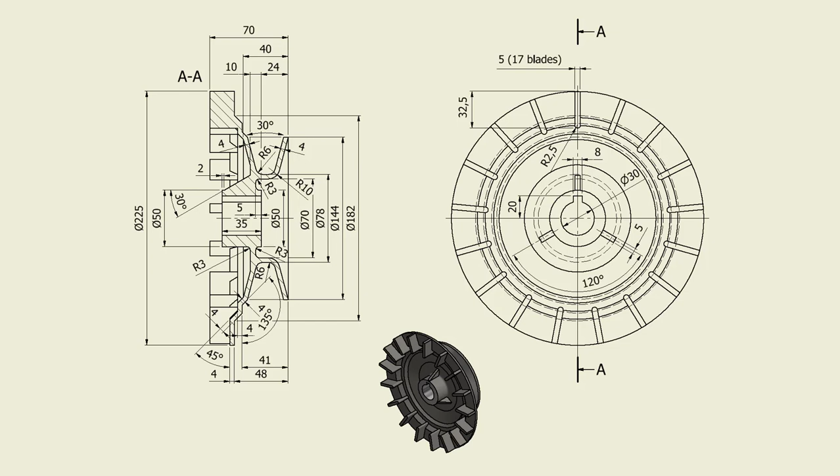Hi my friends, let's model the part number 27 cooling fan from my collection of 100 parts.

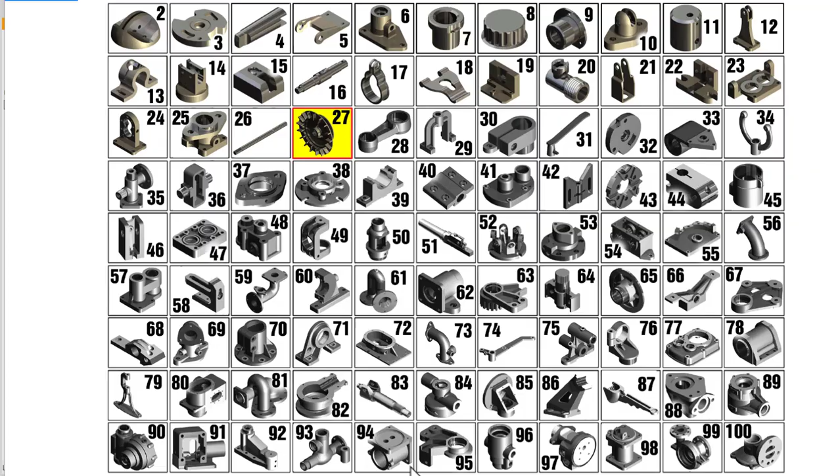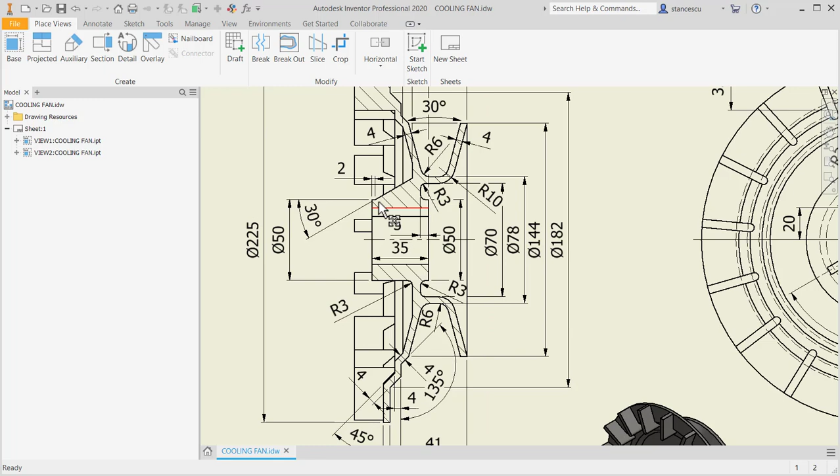Let's study the drawing. As you can see, this is a cooling fan. Look at the orientation, and it is mostly a revolution part. There is a contour here, all with the thickness 4, and a hub in the middle. This is the hub with a keyway.

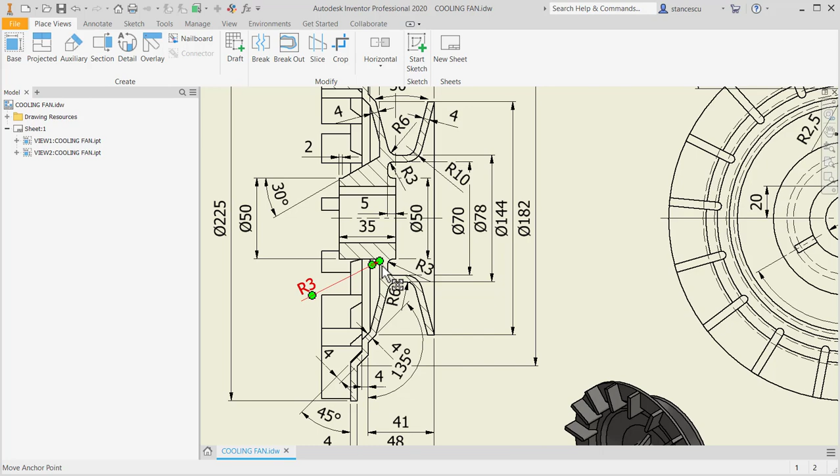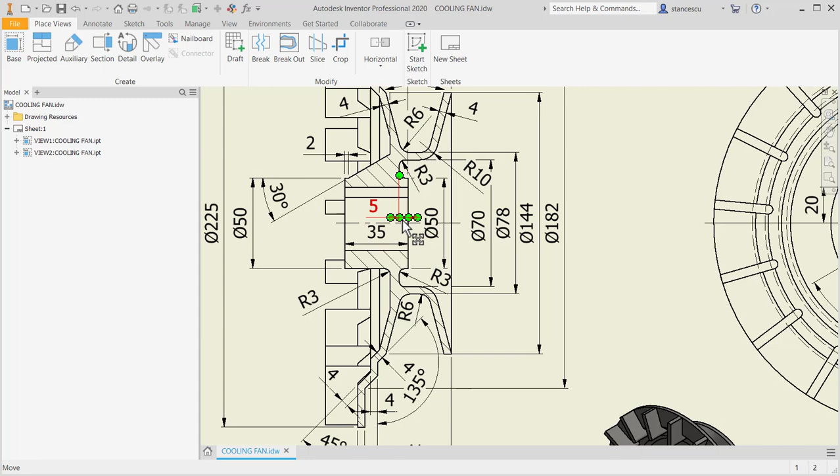And there is a connection between the hub and this contour of revolution based on this small connection. Okay, this is 4 millimeters all. You look also here, and here is 5, and here 10. This means that this is 5 millimeters instead of 4. This is another thing.

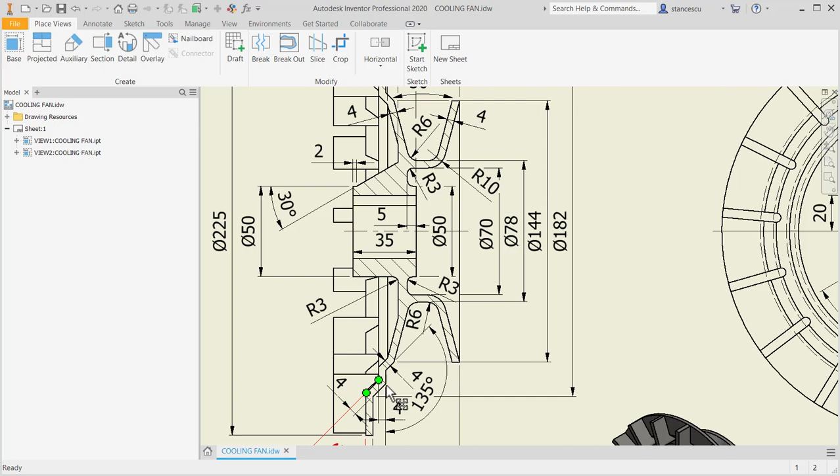We'll start by creating this contour with offset. Let's start. We use this plane, even if this is the vertical and this is horizontal, and I don't rotate the system anyhow. I keep in my mind that this is vertical, this is vertical, and this is horizontal. Okay.

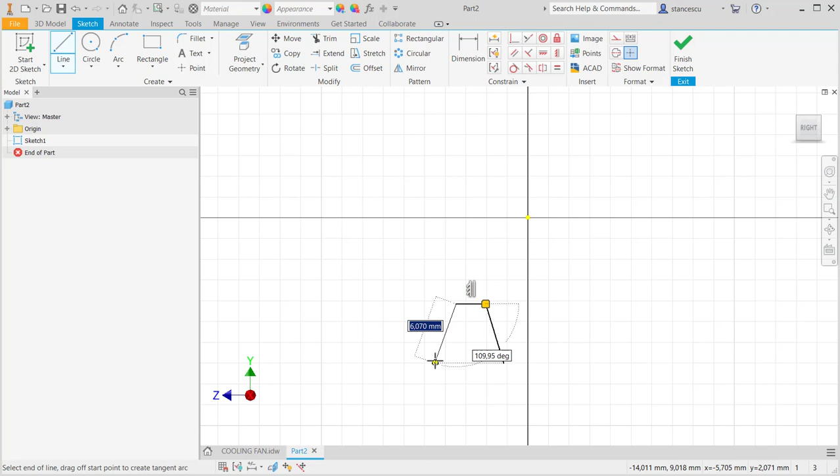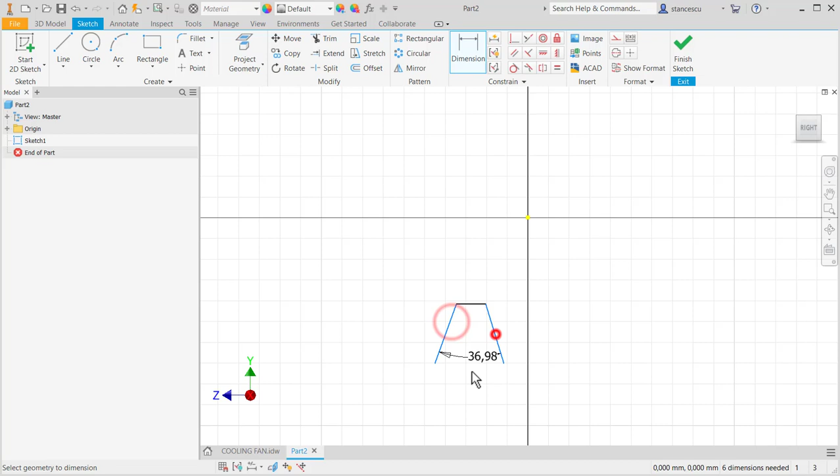Let's create the contour. I start with these 3 lines, which are these ones. Their ends are on the same line, horizontal, which means vertical, and the angle is 30 degrees. So the same vertical, these 2 points. The angle of 30 degrees, and equal this line with this line to be symmetrical.

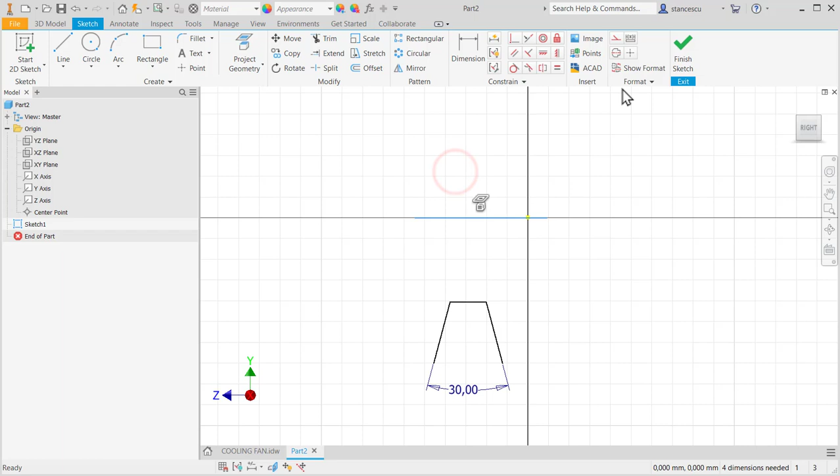Now I project the Z-axis as a center line, and I go to the drawing to see 78 is this diameter. Let's apply 78.

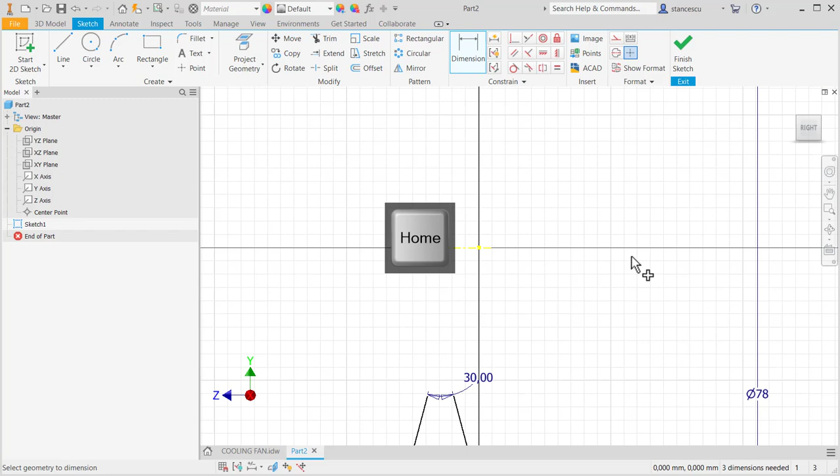Yes, they are in the other direction, but everything is fluid now. You have no idea about the dimension at the first moment, and this is why I try to create something little, not important, to place the dimension. The first dimension is 41 in this direction. I'll draw these 2 slope straight lines and 2 vertical.

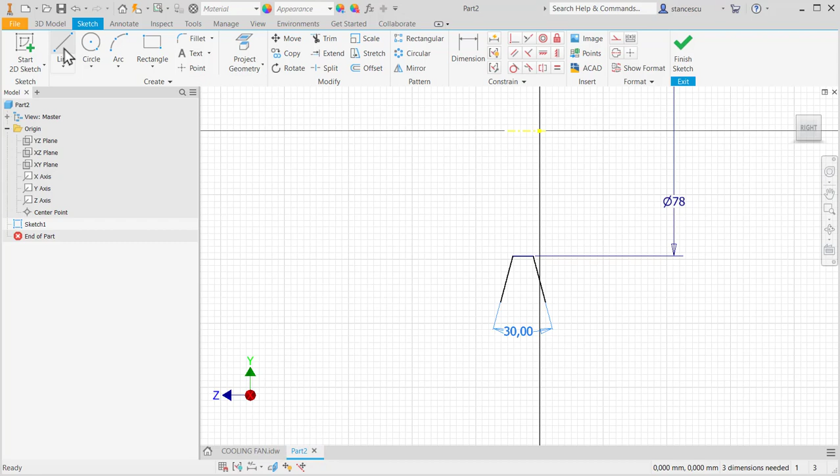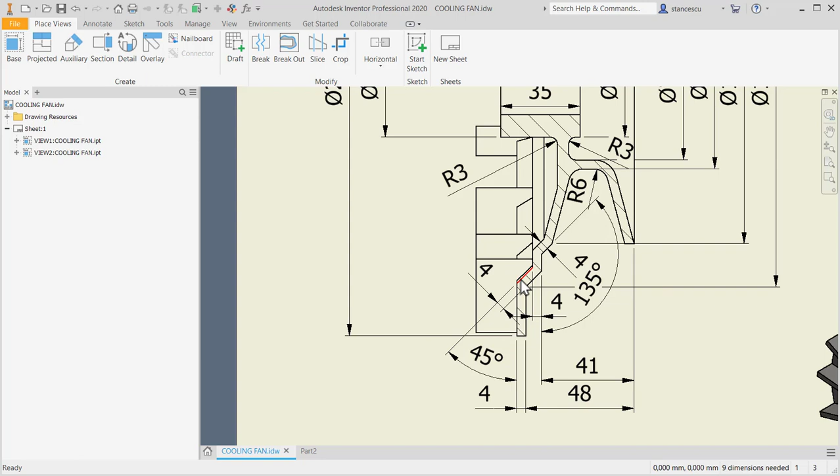One and the other. 2 angles: 135 degrees between these two and 45 degrees the other. This means they are parallel. Of course, 135 and 45.

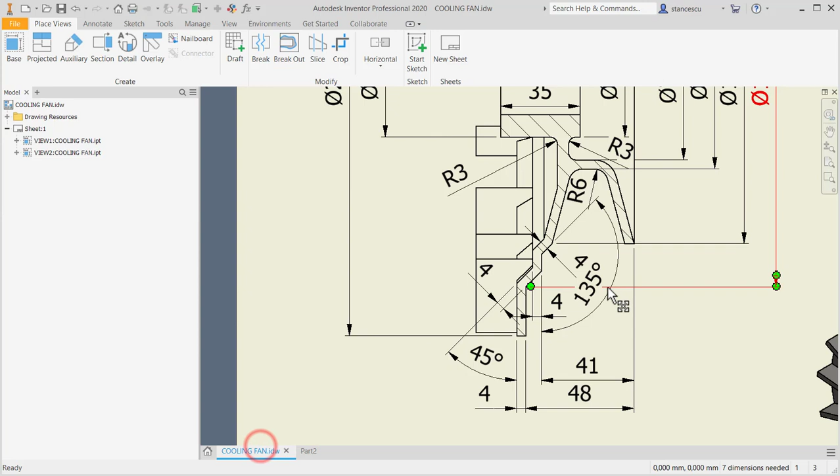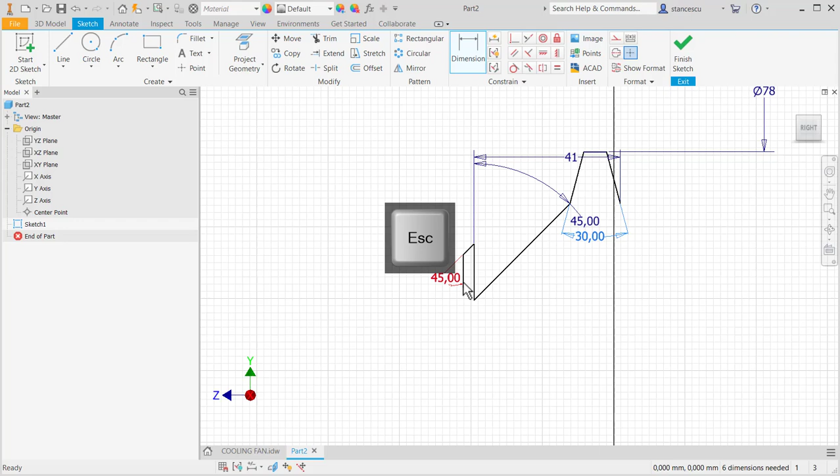Good. Now I can place the dimensions 41 and 48 to the first and second vertical small lines. 41, wow, and moving this here and this, and 48.

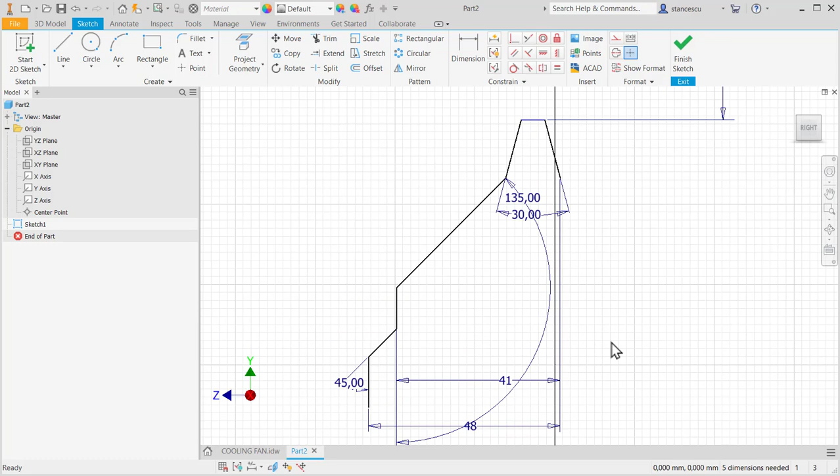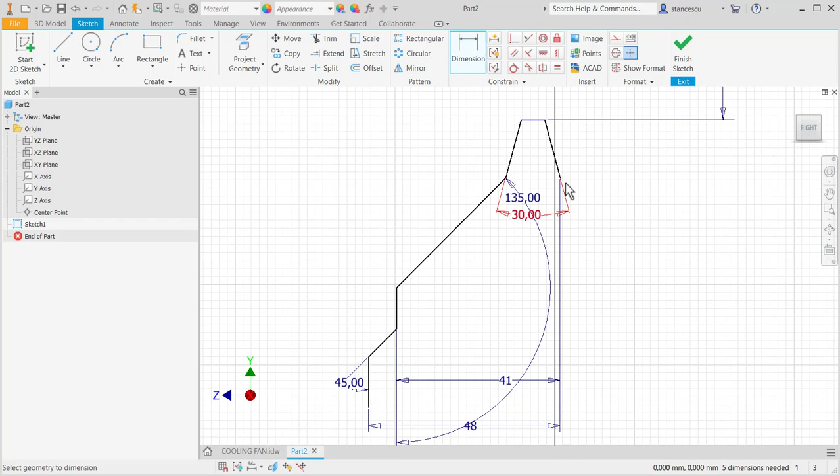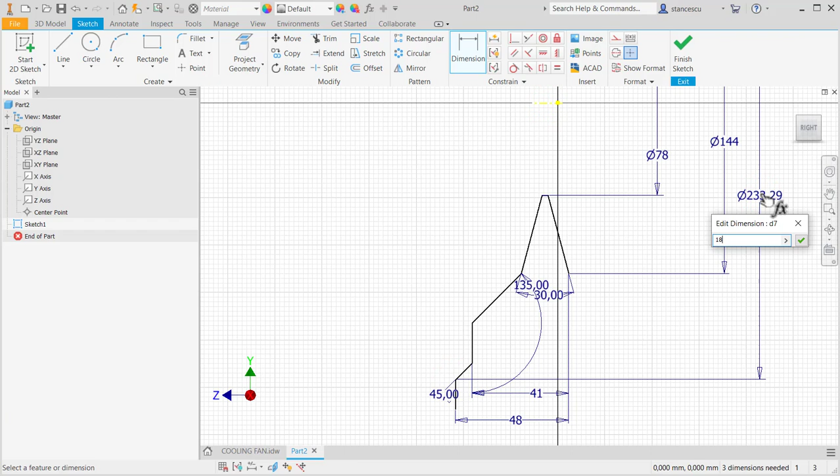Good. Diameters. We have a diameter of 144 here to the aligned ends, and 182 here. Good. This is 144. And 182. Again, we have something wrong, but now it is okay.

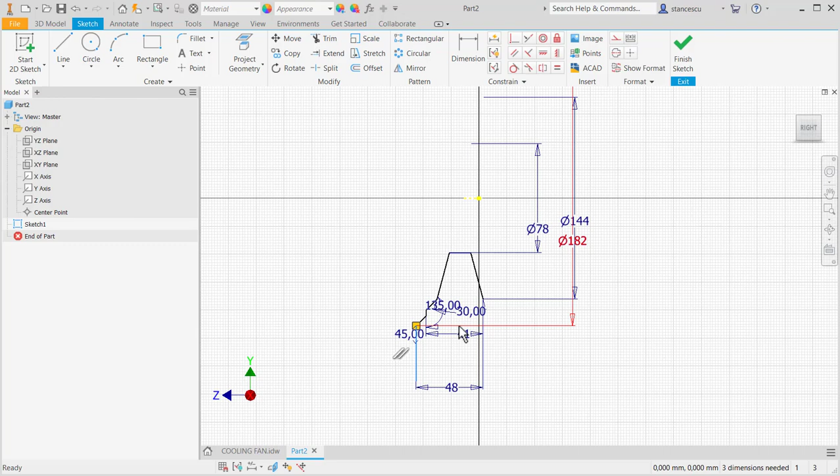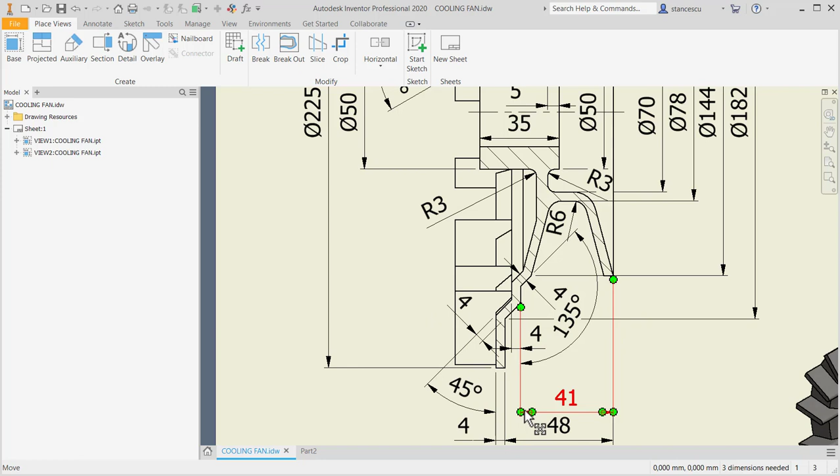We can move all the system except one little element. Let's find where that element is. This is 40 for this point, but this point is on the offset line. This is 41 and this is 40. We have to create offset.

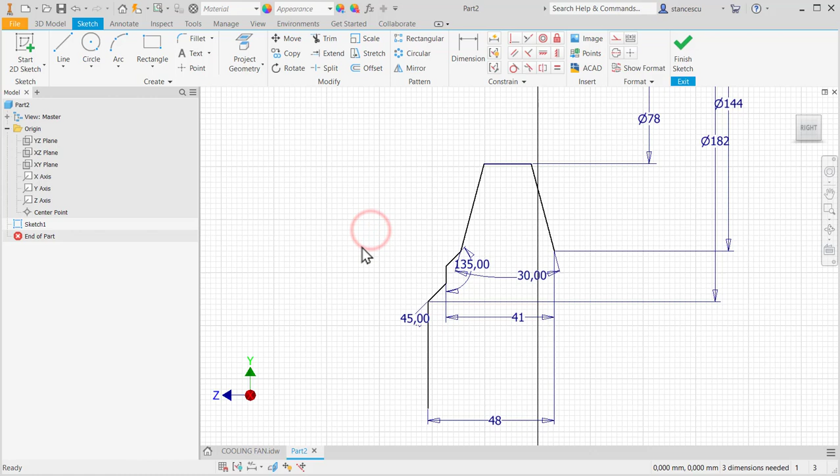Let's create offset. I'll move this a little. Okay, offset 4. Escape. But from where? From this point. Yes. Good.

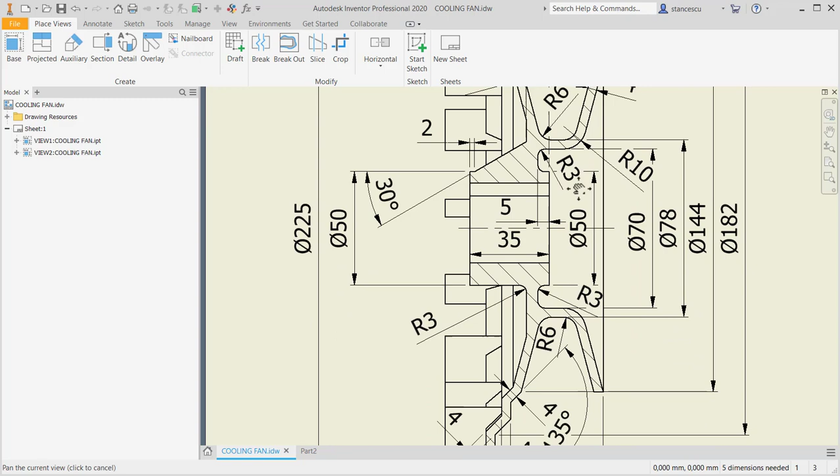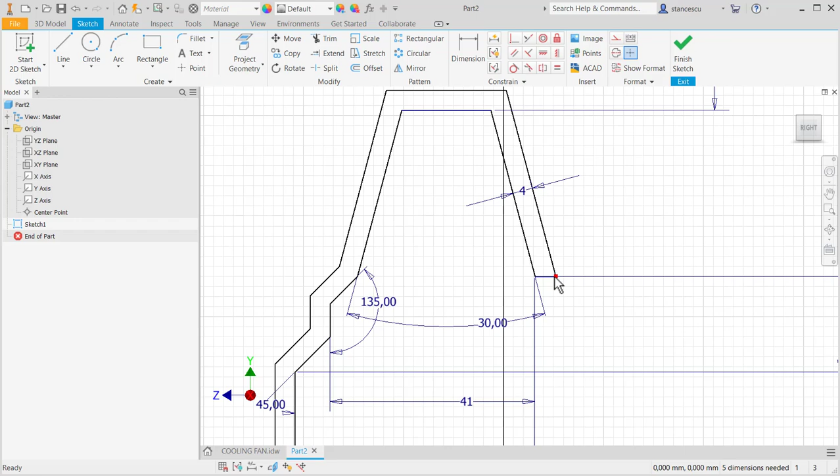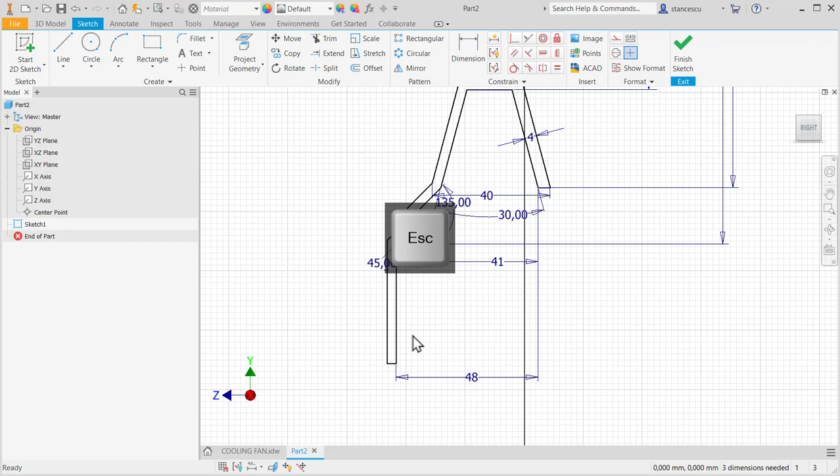We must create that point. We draw a line here. We extend this line and we trim the other, because 40 is from here. Now everything is okay. Line also here, and this diameter, this is 225. This is 225. Escape.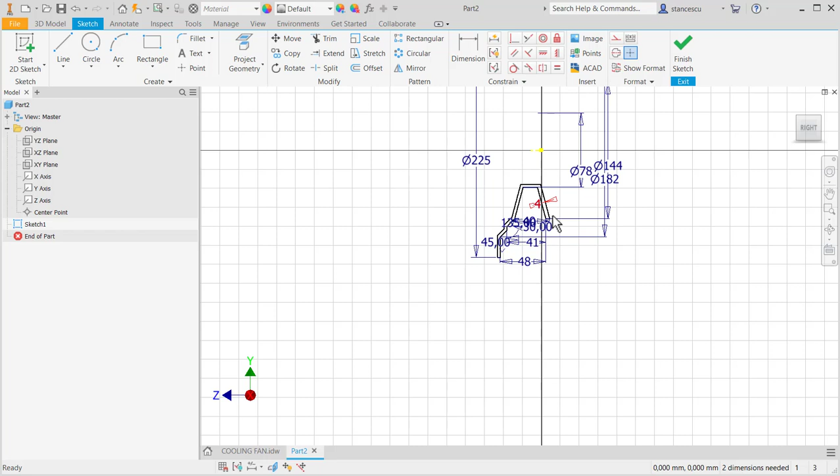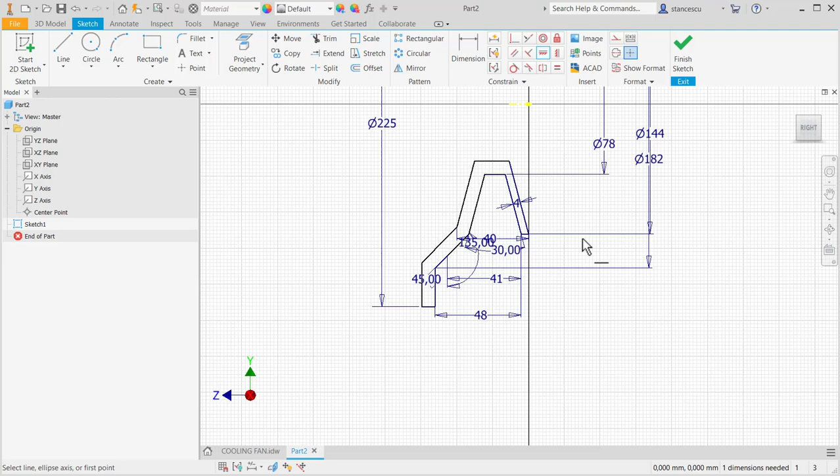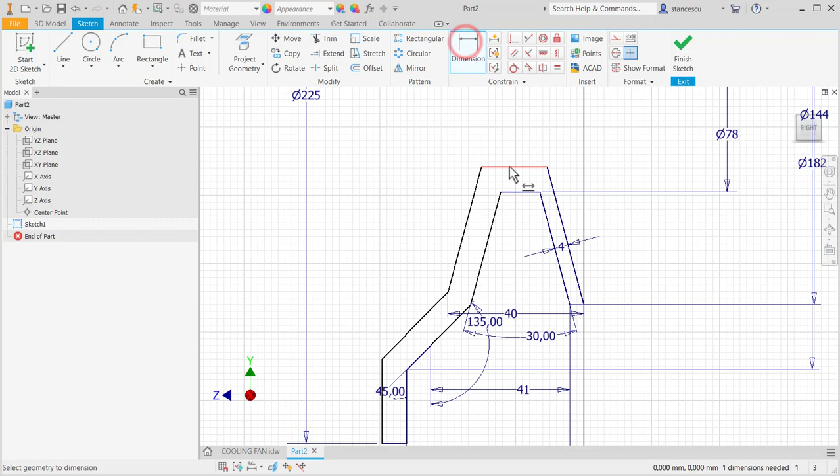This is not good, even if it's also 4 millimeters, 70 to 78, this is 4, but we use the drawing with its dimensions, not inventing 4 here. And now you see everything is okay. More than this, fully constrained. We revolve this to obtain the first contour.

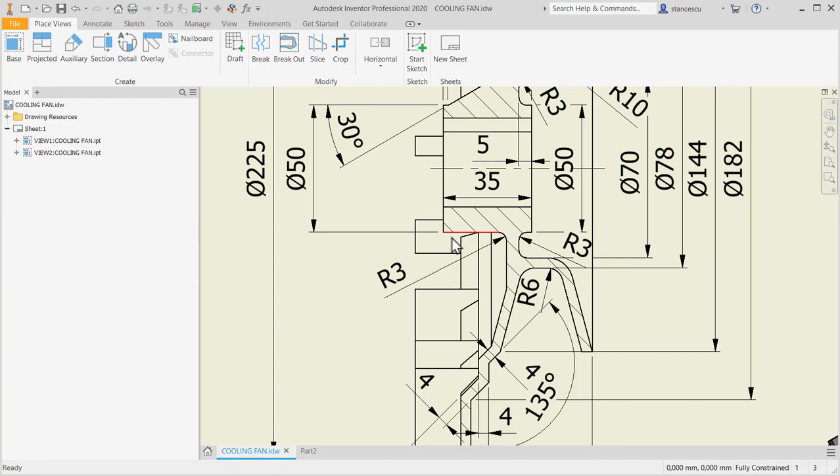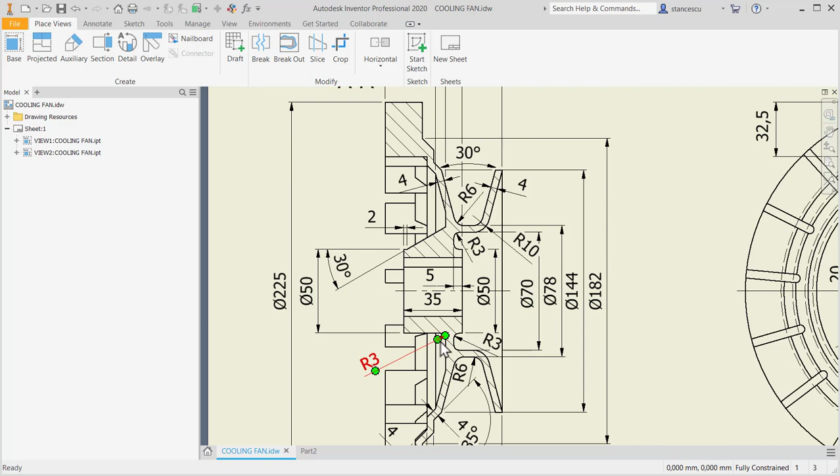Now, I draw the hub. This is the hub. What are its diameters? This is 50, and the interior is 30. Measuring from here, we have 24, and the hub is 35. This is a rectangle between 50 and 30, like this one. This is the hub, yes?

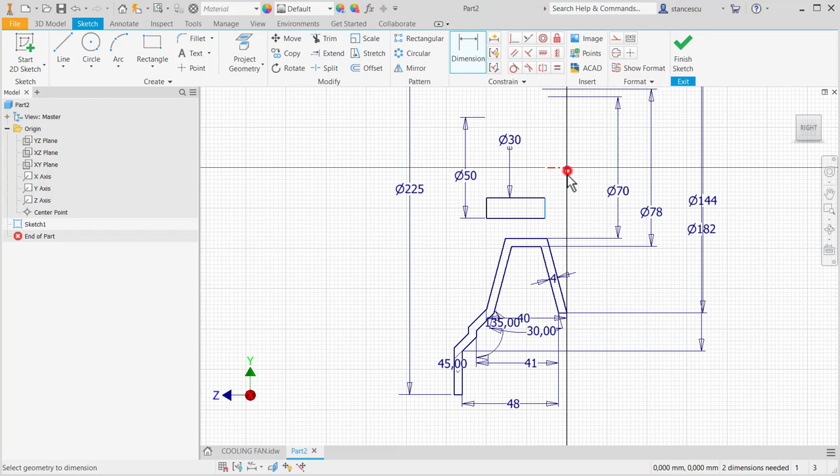Dimensions 30, 50, 24 from this point, 24 and 35, if you remember.

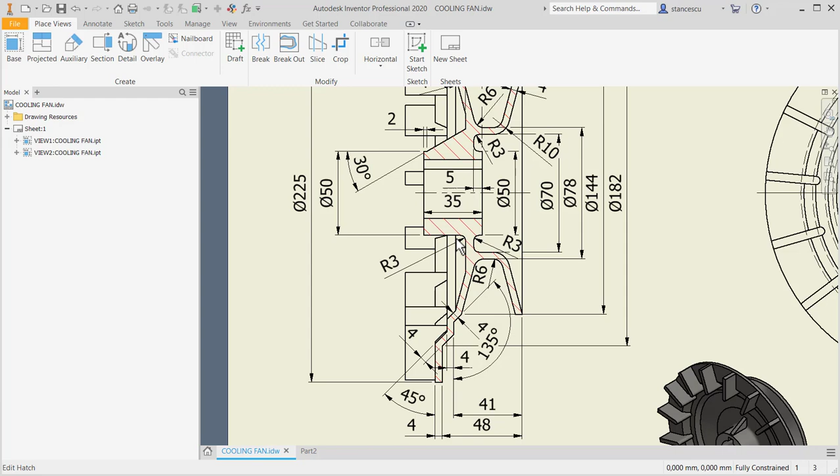This is the hub, and here is a connection to the contour with offset, 5 millimeters and 10 millimeters, 10 and 5, yes. We draw a line from here to here, and we place the dimension 5.

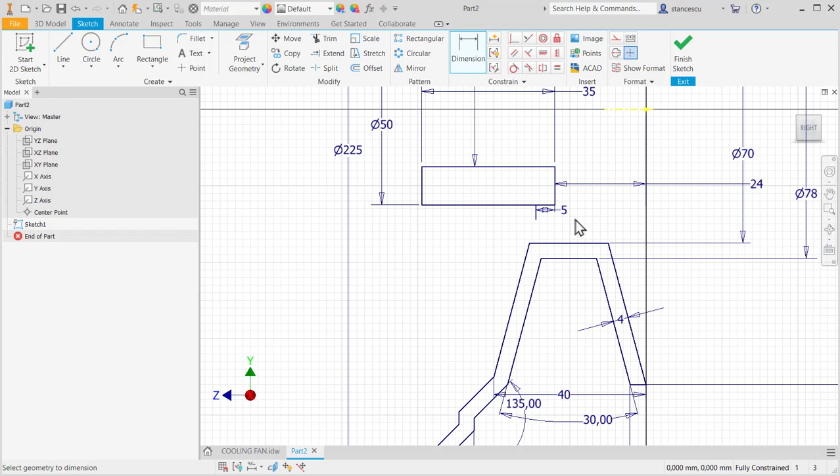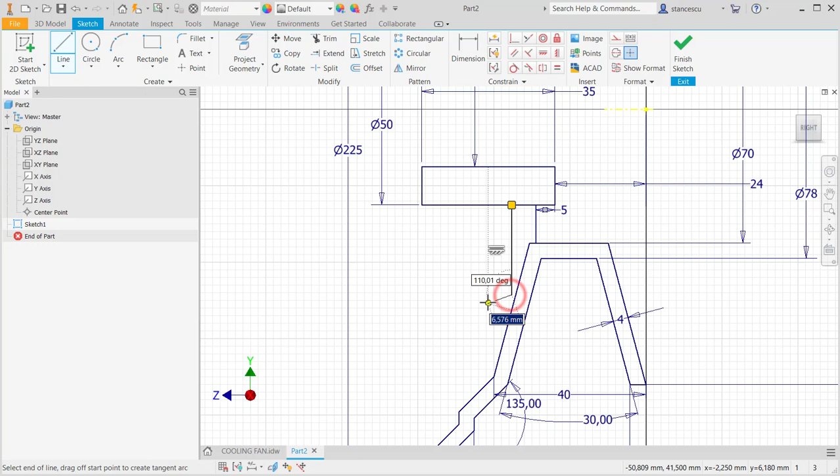This is the line. Extend to this. Good. The other line is not at the middle. This is at 10 millimeters from the front. And trim

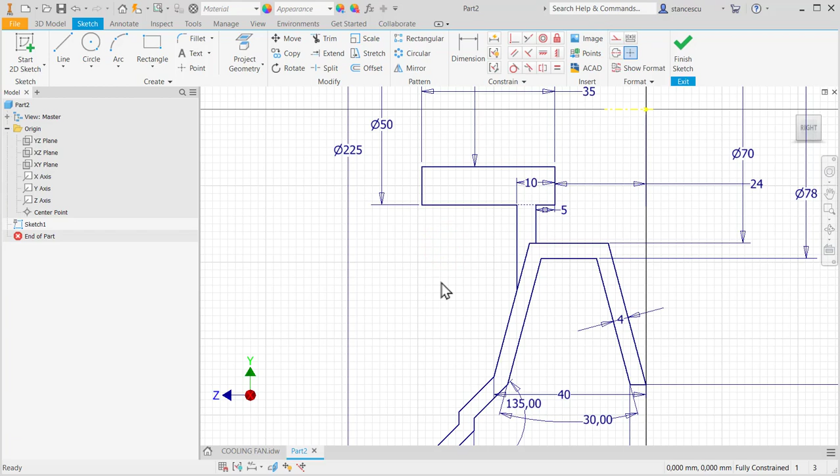this. I don't create here any connection, like in the other, like here, where I can convert this to construction line, and I shall create revolve for both closed contours, closed areas. Yes, finish sketch, F6, revolve.

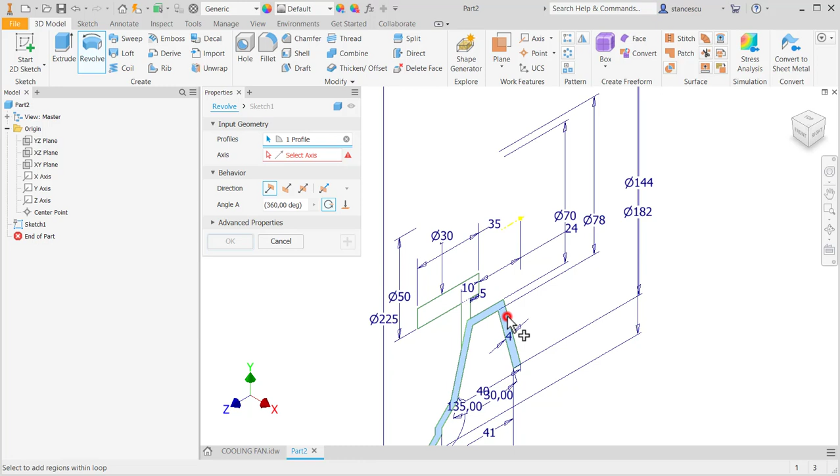One is this, and other is this. What is the axis? He knows. Okay. The most part is done. Yes, this is, and look at it.

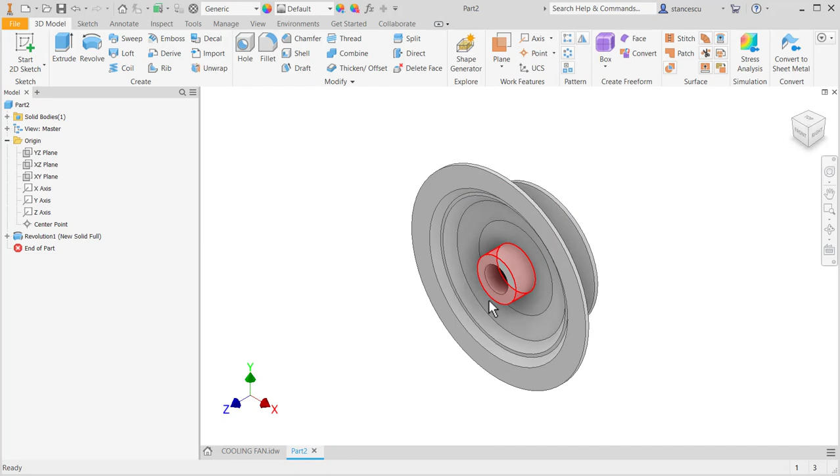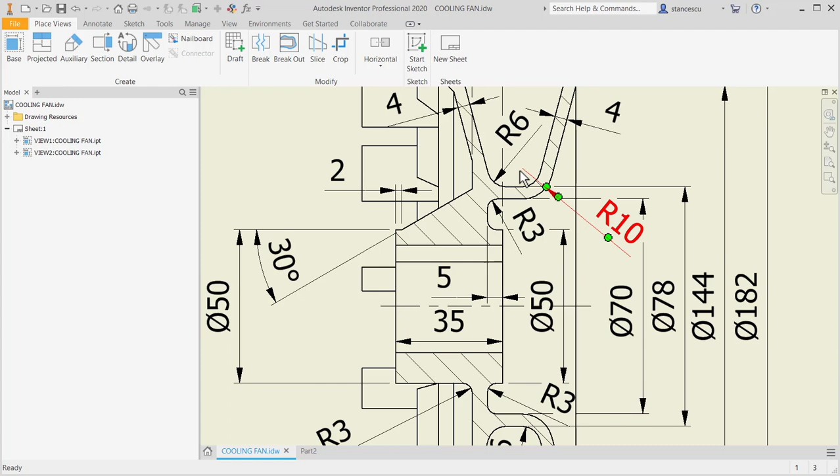Let's apply fillets. As you can see, radius 3 in both interiors, and here 3, 3, 3, and then 6 and 10, which means 10 minus 6 is 4 millimeters, this. These are 6, and these are all fillets here.

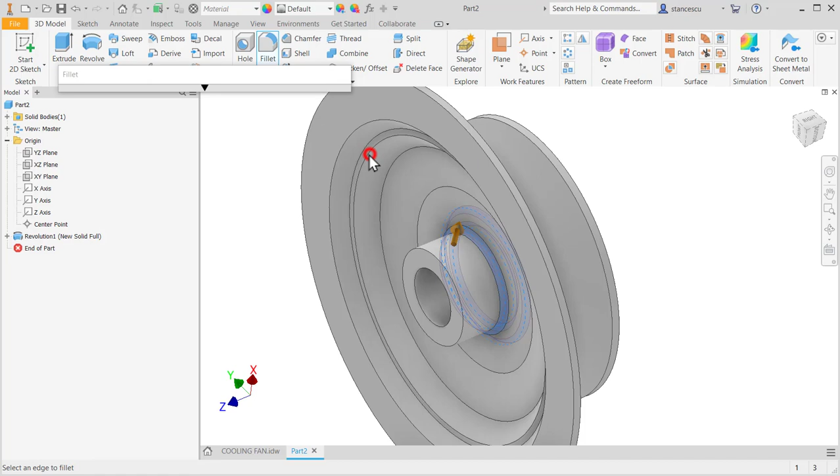Let's apply. One is this, 3, and the other are here, 1, 2. Yes? Okay, plus. And now I add, this is 6, and this is also 6, plus this, which is 10. Okay, very interesting.

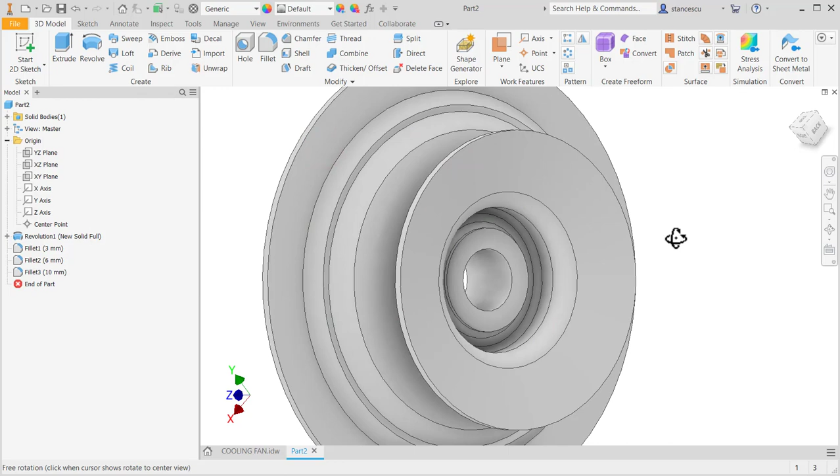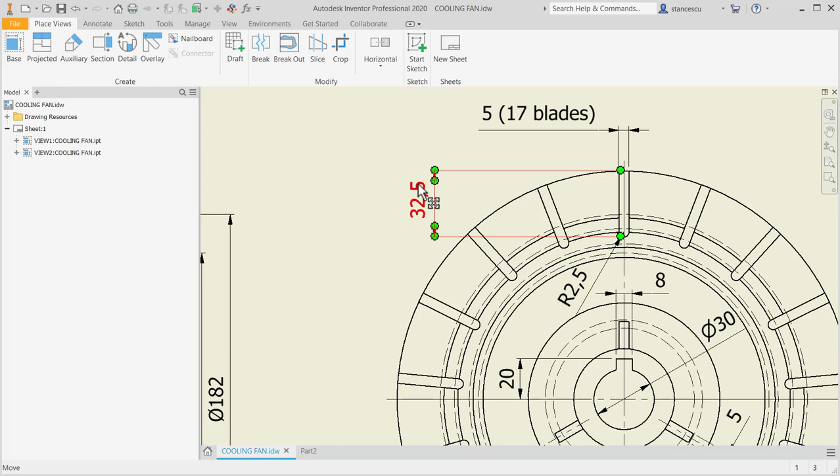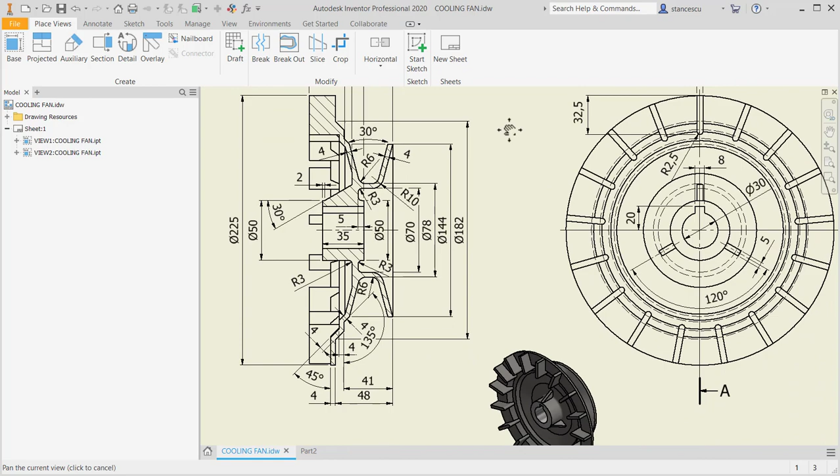Let's create now the blades. 17 blades with a thickness of 5, and this dimension with a round end, 32.5. But this is somewhere in the air. We have to create this plane at 70 from the center point. Here is the center point of our construction. 70, yes?

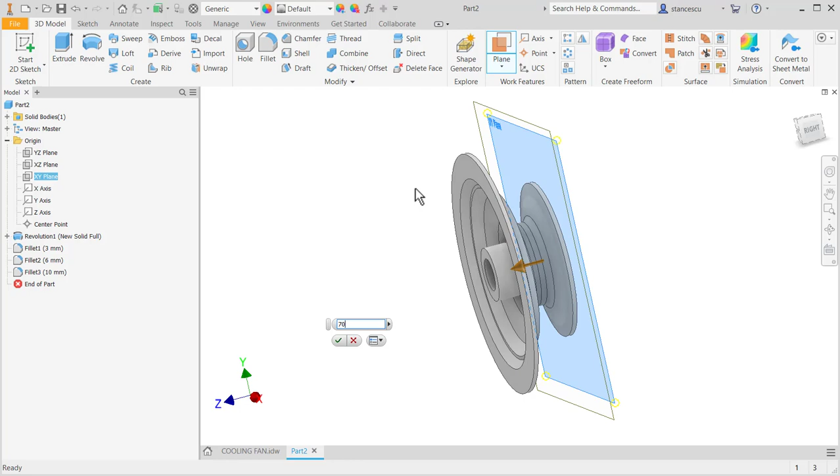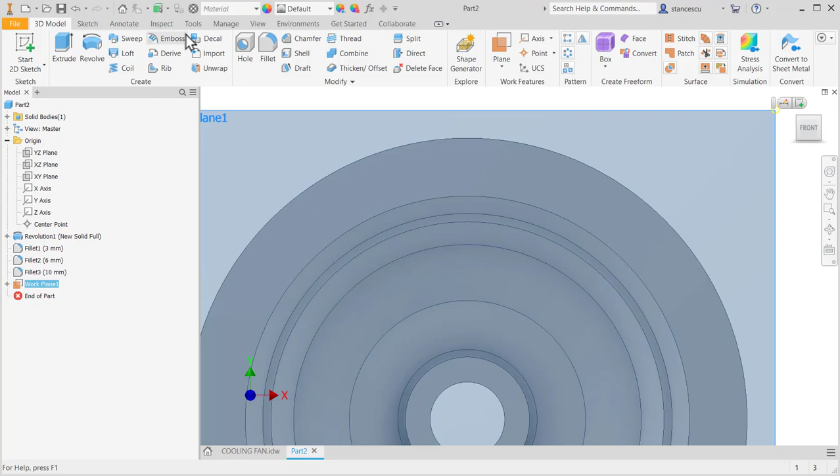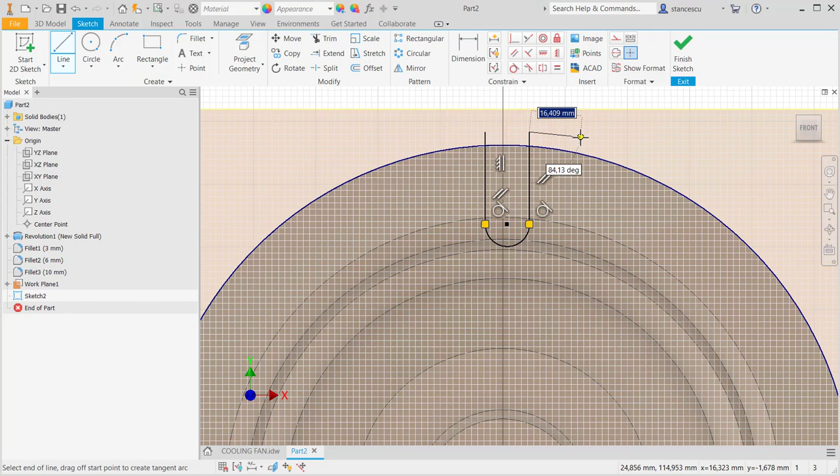Plane. At 70, parallel with XY plane. You see? We create the first blade here, creating a sketch in this virtual plane. I draw a line not from here. With the center on the vertical, really vertical this time, which is not so large.

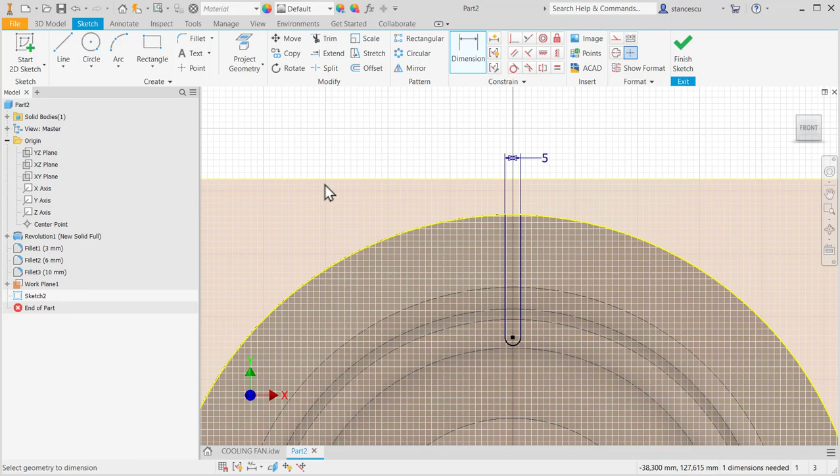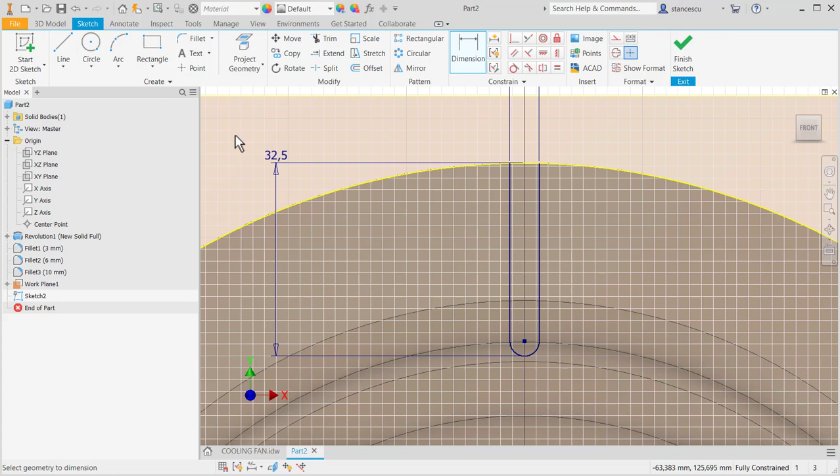Trim the ends, dimension 5, and 32.5 from this end, and here I wait a little to have the external points. 32.5. Good. Now an arc from this point to this point and the third. Yes, this is a closed contour.

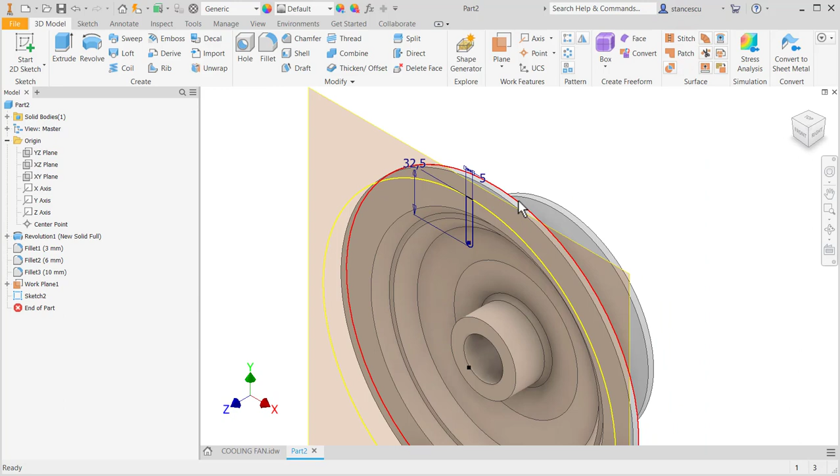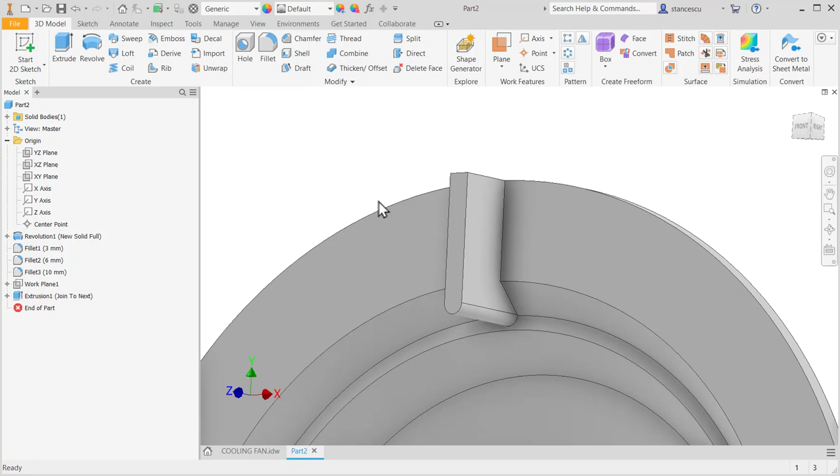F6, extrude this to the part, to next. Yes, why? Because it is tricky. Yes, okay, this plane must be not visible, and now 17. Features is this, axis is this, and number is 17. Okay, F6, look at me.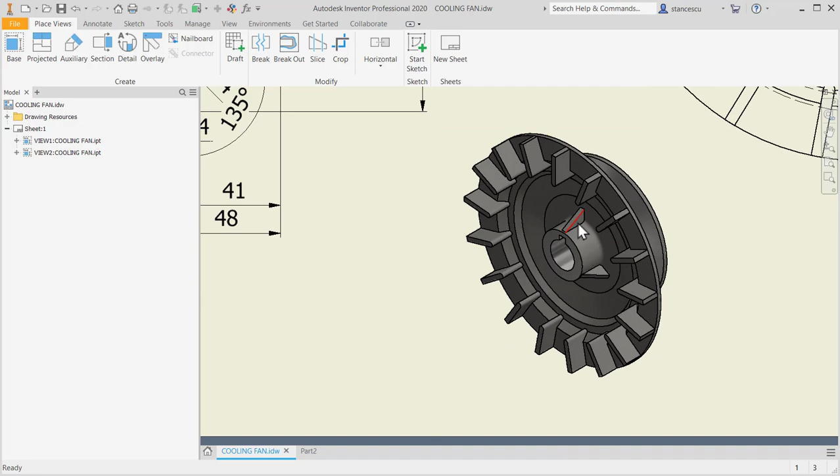Now these ribs, yes, what are their dimensions? 2 millimeters from the end of the hub at the left and 30 degrees. We know from my first tutorial how to create a rib. You have to look to the first tutorial, the first part of my tutorials.

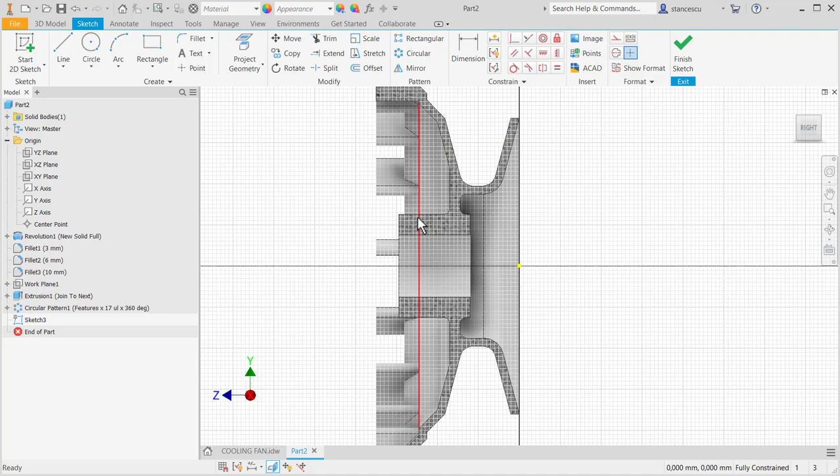Rib, but we have to create a sketch. This plane, sketch, F7 to see inside, and a line, a very line. Project this geometry, but construction, and another line, another projection is also construction, the axis Z, to place that angle of 30

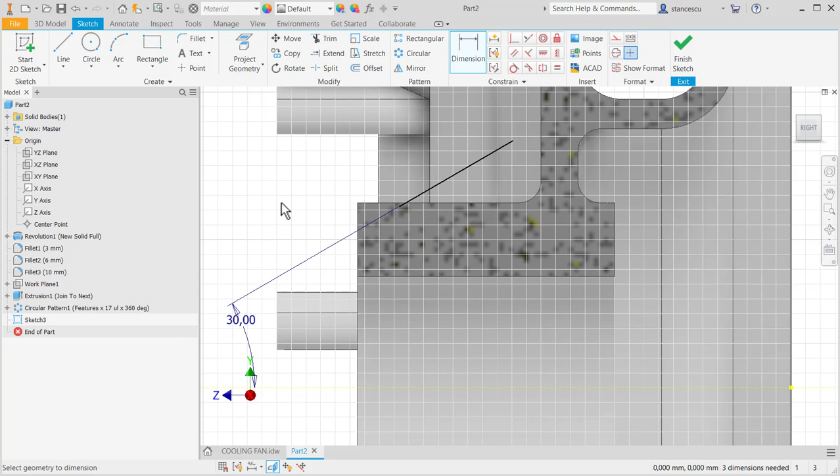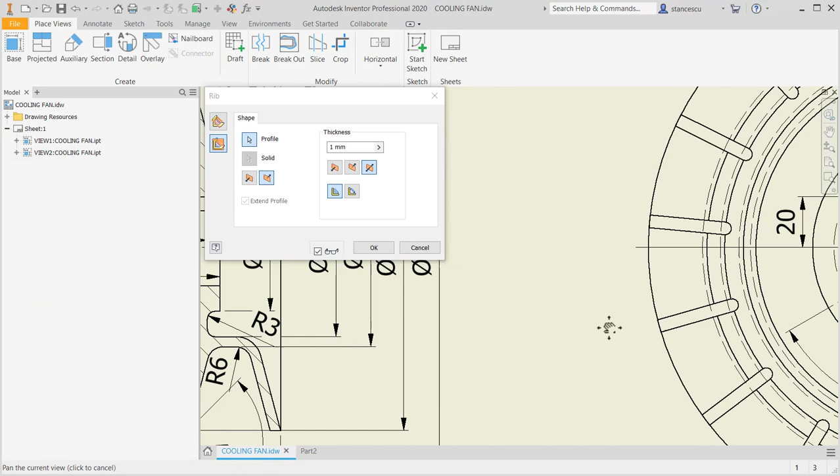and trim this end to place 2 millimeters, the other dimension. The other end is not important. You see, rib, this model. What is the dimension? The dimension is 5. This is the solution, and symmetrical, yes, symmetrical. Okay,

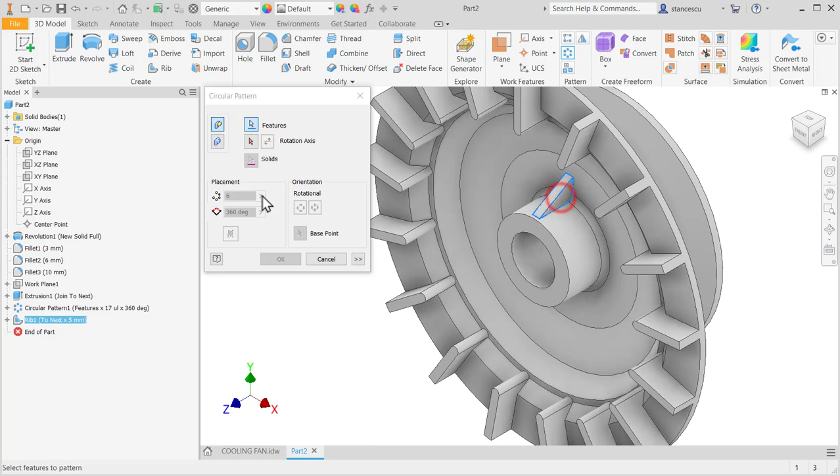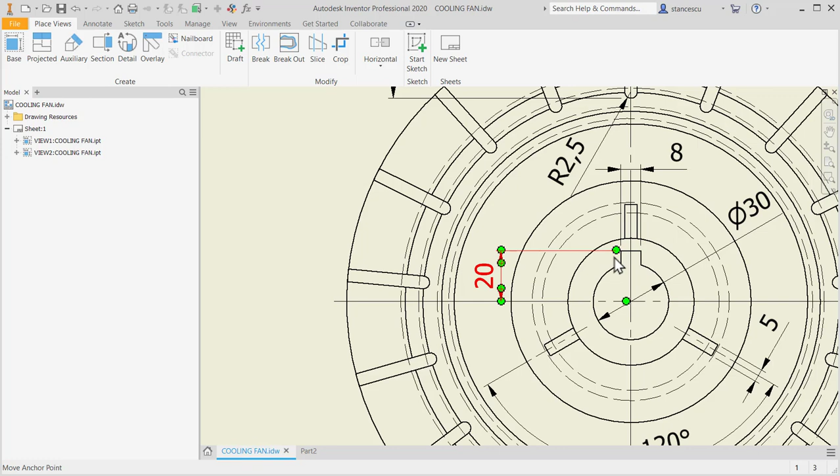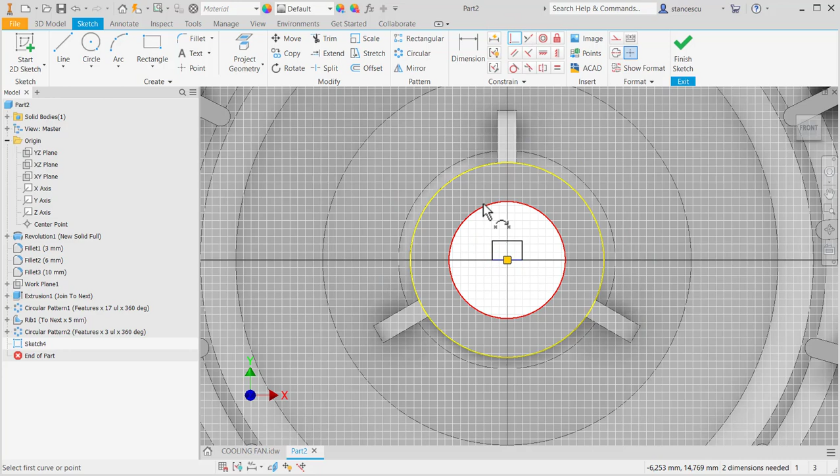circular pattern of this around this axis, 3 of them, 3, and the last thing is this keyway, 20 with 8. A sketch on this face, a rectangle with this point over the center, 20 and 8. Finish sketch, extrude, cut all the way.

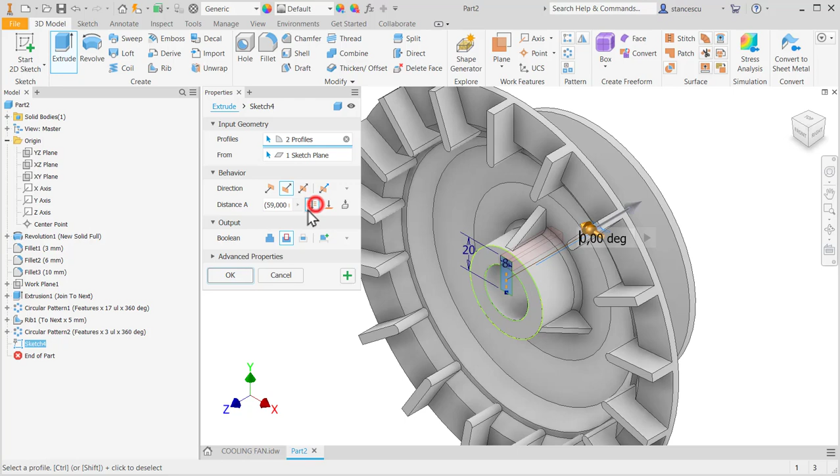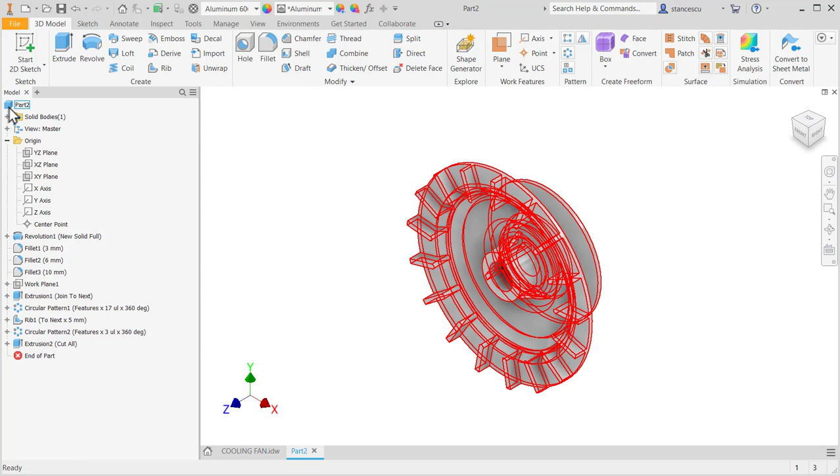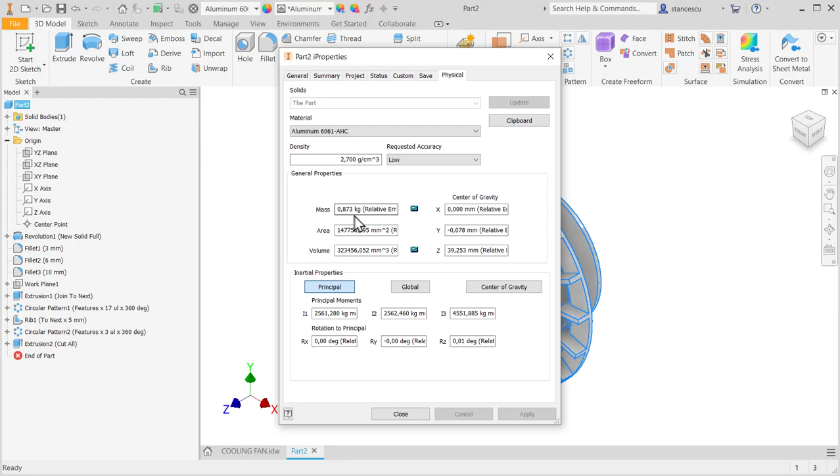Okay. Now, my friends, we have the part. Look at it. Everything is okay. Yes? Then we can apply material aluminum to be lighter. Aluminum polished. The data, what is the density of aluminum? Who knows? 2.7, my friends. 2.7 kilograms on cubic decimeter. 0.873 kilograms. That's all for today.